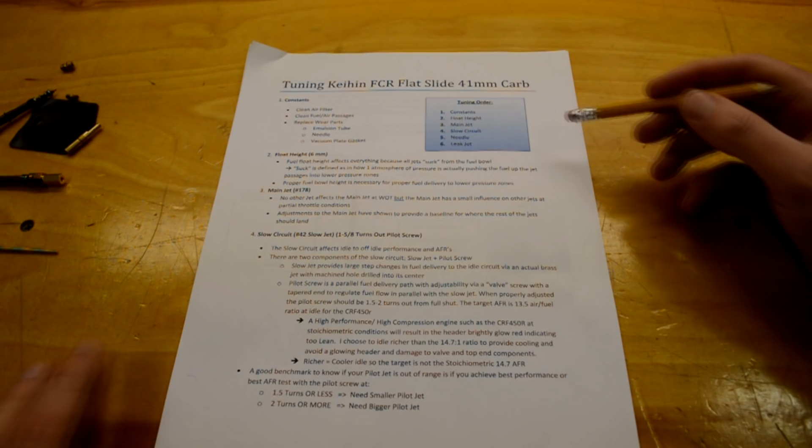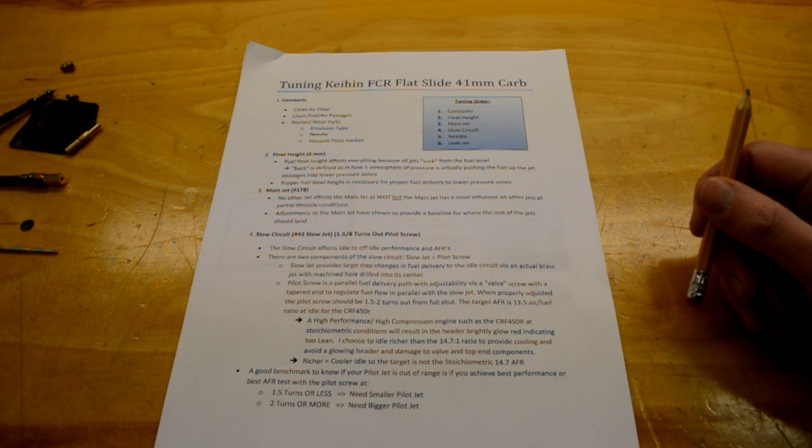This tuning order I came up with wasn't from any specific location, but was more of a collaboration of internet searches, the Honda manual for my bike, and some forums like Supermoto Junkie, and also mostly Thumper Talk. But I came up with this tuning order that I found most useful.

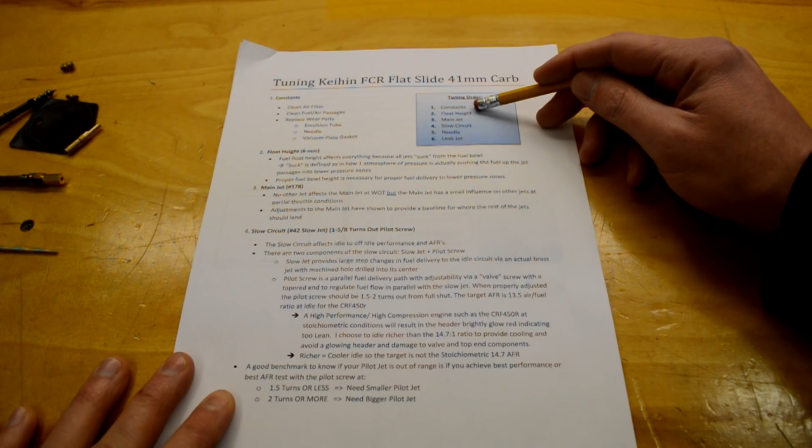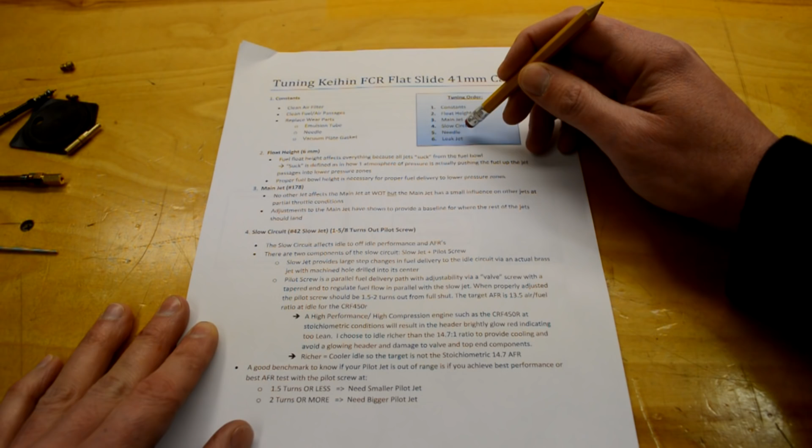First is your constants, and I'll explain those later. Second is your float height. Third, go to the main jet. Fourth, the slow circuit. Fifth, you're going to pick a needle, and then sixth, and the final one, is your leak jet.

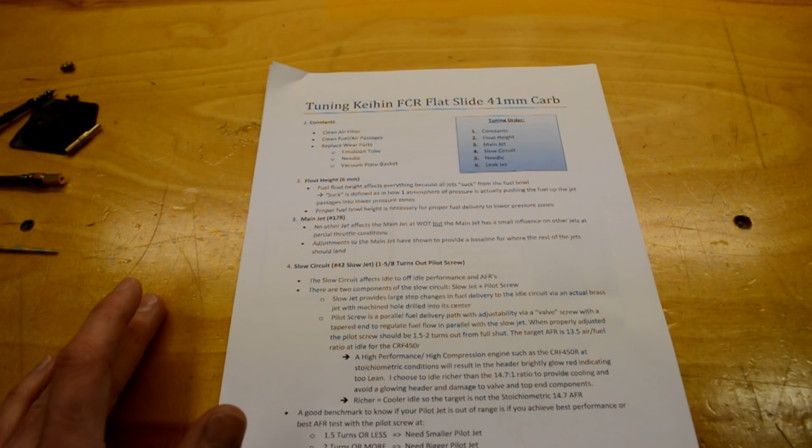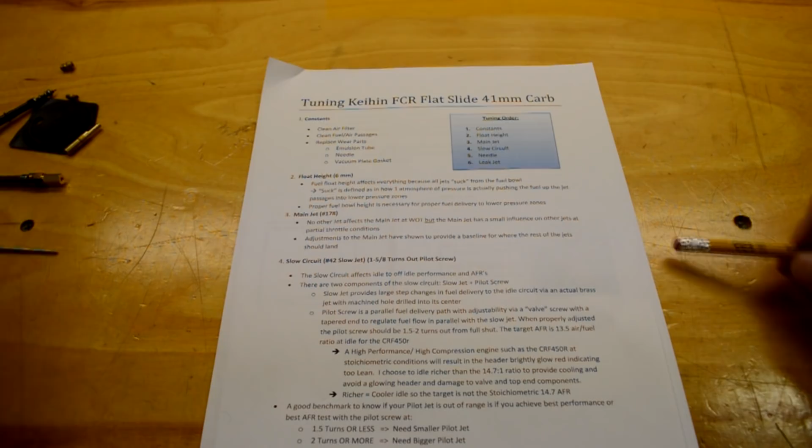What I mean by the constants is starting off with a clean air filter. There's no sense tuning with a dirty air filter, so use a clean one. Also your fuel and air passages - there are countless orifices and fuel delivery paths machined into the barrels and body of the carburetor, and they all have to be able to supply the proper amount of fuel that the jet is delivering to them.

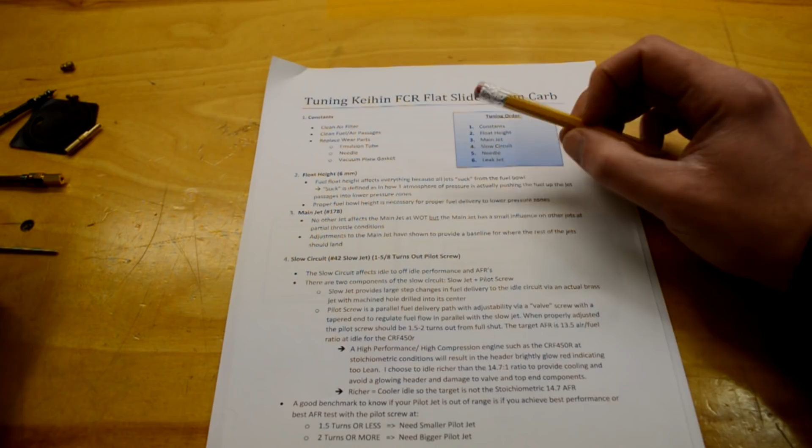Also, replace wear parts. The emulsion tube, needle, and vacuum plate gasket are the three I can think of off the top of my head. The emulsion tube is what actually carries the needle, so you have the needle dropping down into the emulsion tube with the main jet below it.

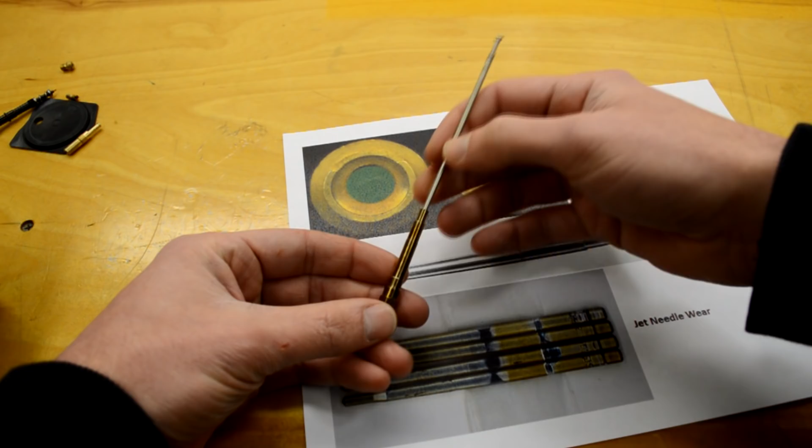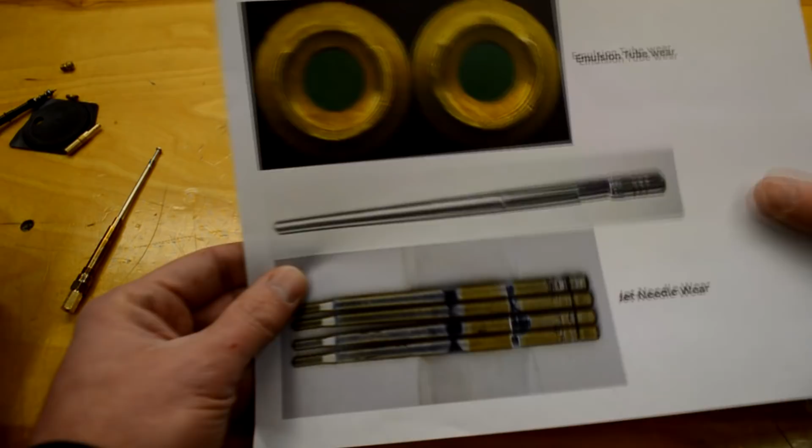On big bore single cylinder engines there's quite a lot of vibration, and what can end up happening is when that needle is at a partly retracted position, it can vibrate and actually wear out the emulsion tube. So shown in this picture, you have an emulsion tube with a green circle overlaid onto it, and in this dark area you can see where the metal is worn away, and what that's doing now is actually passing fuel up through the main jet and into the carburetor body.

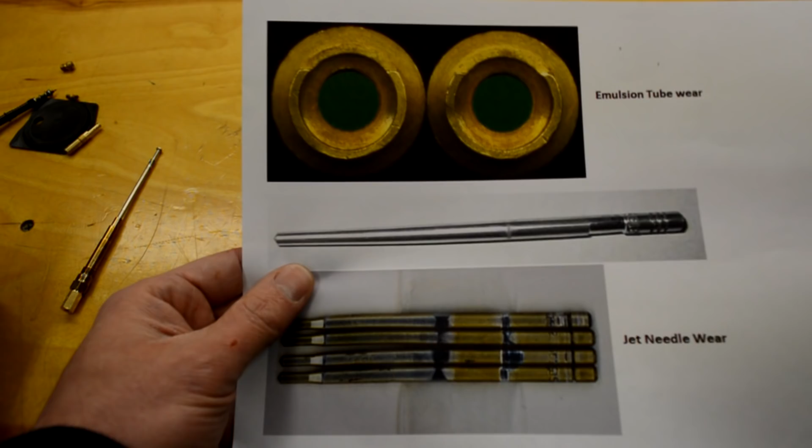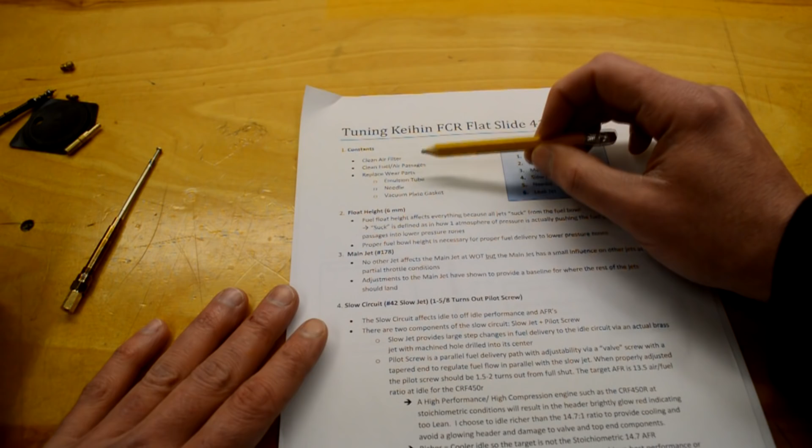Also in the needle you have excessive wear near the clip position, and some minor finish wear, but still the decreased metal surface is allowing fuel to leak by. So that's what I mean - go through the carburetor, clean it out, make sure there's nothing blocking the passages, because if you're trying to tune around mechanical deficiencies, you're just going to end up chasing yourself, and you're going to end up doing it anyway in the end after already putting effort into it.

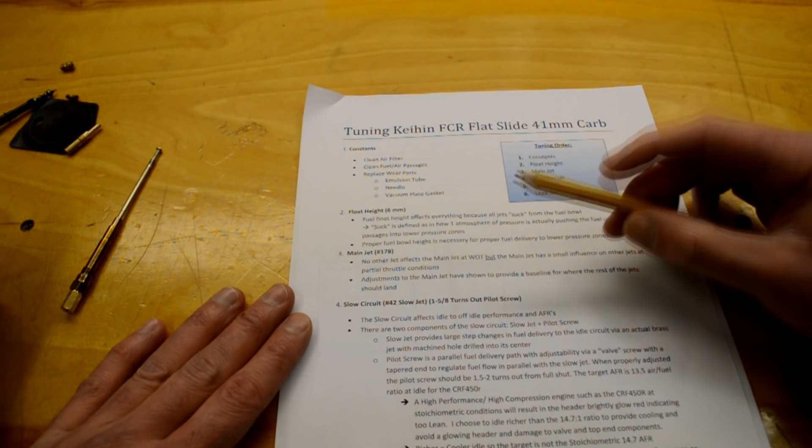So right from the beginning, start off with the constants. Get a clean air filter on there, clean all the fuel and air passages, blow them out with air, and get everything good to go before you even start messing with the jets.

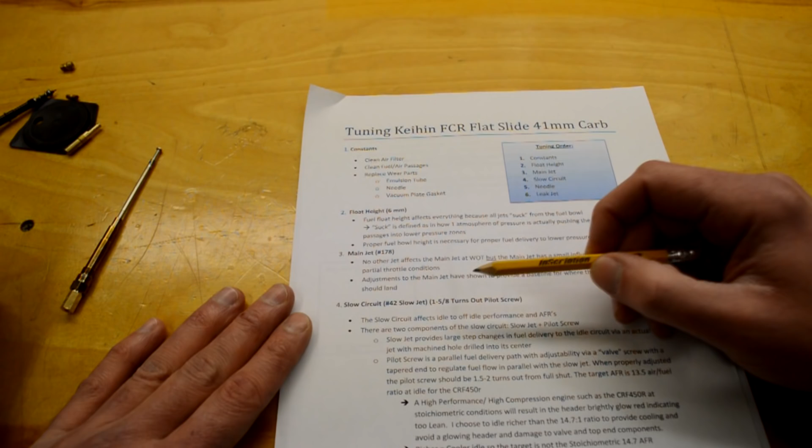Number 2 is your float height. Should be 6 millimeters. The float height affects everything because all your jets suck from the fuel bowl. When I say suck, I mean you have a fuel level in here, and one atmosphere of pressure pushing down on that fuel surface. All the jets actually stick into that fuel level.

In the throat of the carburetor, when you have high velocity air moving through, it creates a low pressure zone right at this venturi. That low pressure area, combined with the outside atmospheric pressure, is actually pushing the fuel from the fuel bowl up the jets into the carburetor throat.

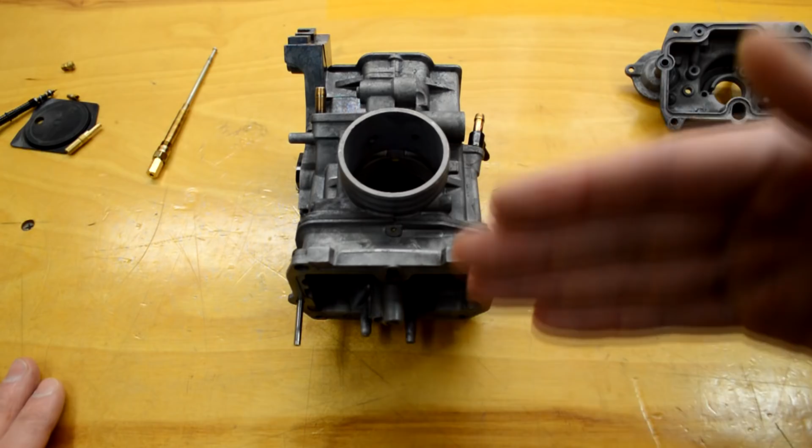So if you have a high or low fuel float level in there, in conjunction with atmospheric pressure, your jets are going to be moving a different amount of fuel than they were intended for. That's why it's important to have your fuel float height set perfect before you even start to tune jets or the rest of it, because that has an effect on every jet.

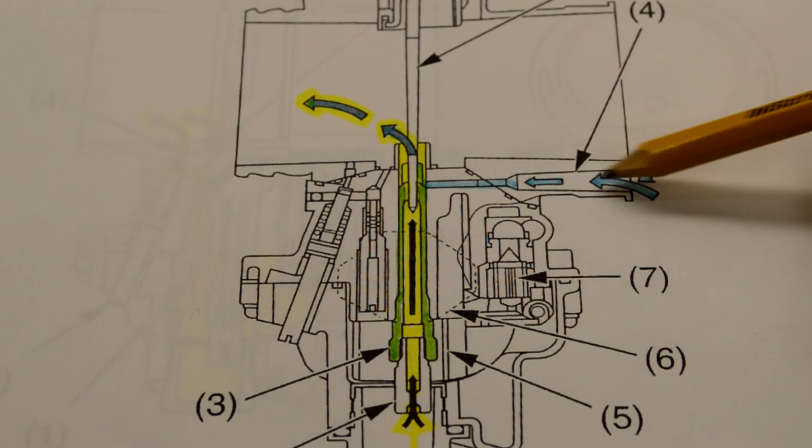How the main jet works is you have an air jet. It's non-adjustable, but it passes air through the clean side, here, through this tube, and that's the blue. What happens is your float height sets the fuel level down here.

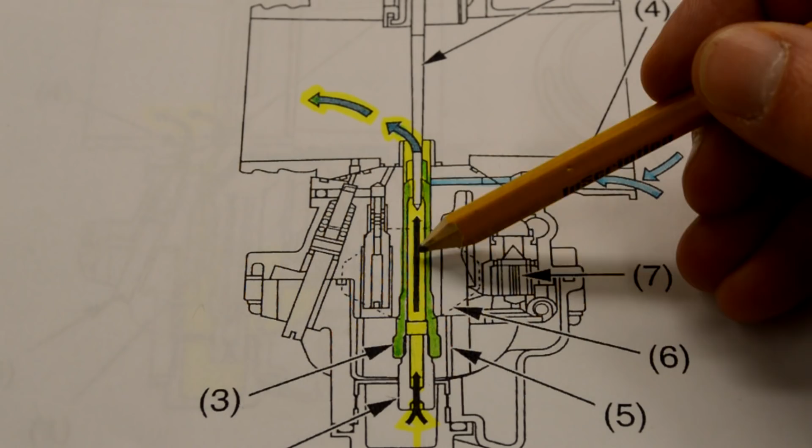So you have fuel up to here, which is burying the main jet pickup, down here. As air moves in through this tube, it creates that low pressure area, and fuel is being sucked up through the main jet, through this orifice, up into the emulsion tube area, and the needle, being all the way out, is letting the fuel just flow right up into here and mix with the air.

The main jet for an 08 CRF450R should be a 178. The reason why I'm starting with this one first is because no other jet affects the main jet at wide open throttle, which is where the main jet operates. But the main jet has a small influence on other jets at partial throttle conditions. So doing anything else in the carburetor isn't going to make any change to your wide open throttle condition with your main jet.

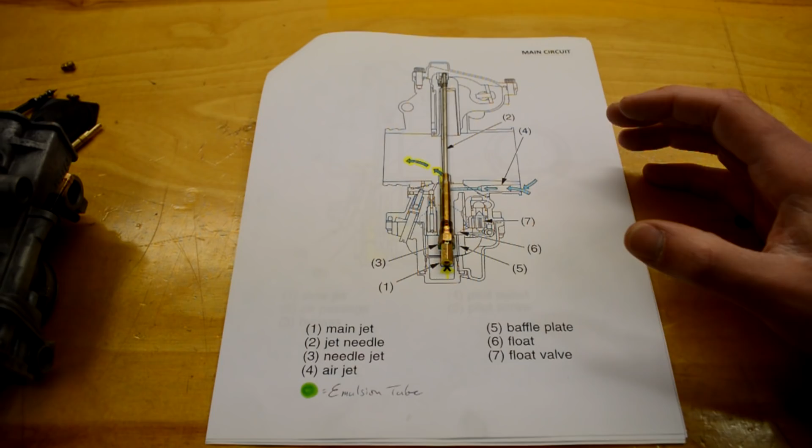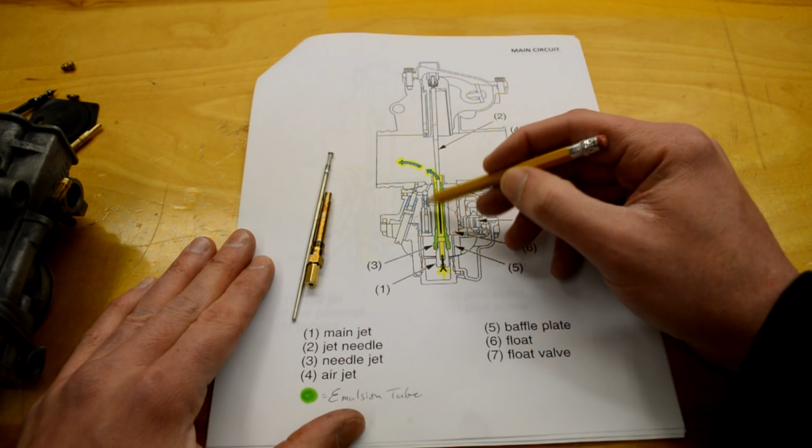When the throttle's closed and the emulsion tube is supporting the needle, you have a small amount of fuel leakage up through the needle and emulsion tube taper, just because of the venturi action going on right here. Even though some of the fuel is being sucked up through the slow circuit, which we'll get to after this, most of it's being regulated by the slow circuit. Some of it's actually still being pulled up that main jet, leaking up through here and into the carburetor throat for the engine to burn.

So that's why it's important, when you've got everything else you don't have an idea about, to just get the main jet settled in first, and then that's one down.

How this works is you have air, again, coming in through the air screw, the air pilot, and it comes and mixes in this section right here next to these drilled holes in the pilot jet. It pulls or sucks some of the fuel up through the pilot jet and allows it to go up this bore into the carburetor throat area.

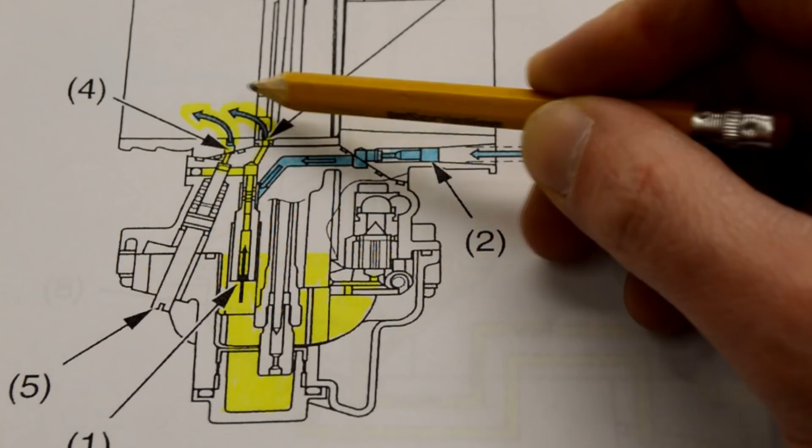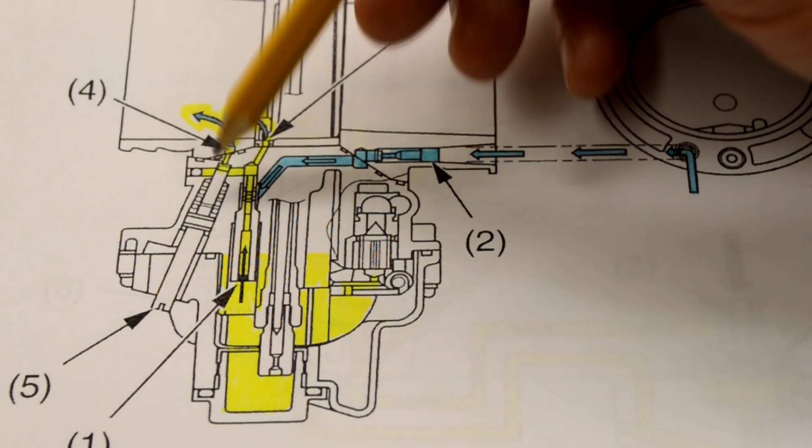In conjunction with this one, you also have fuel being moved up through the pilot screw and through this bore, also coming up into the throat area. The motive force for these is the air that's rushing through the engine, not so much the air screw for the pilot screw. So it's kind of like two valves, or one valve and one jet, and in parallel they deliver the fuel you need to idle the motor.

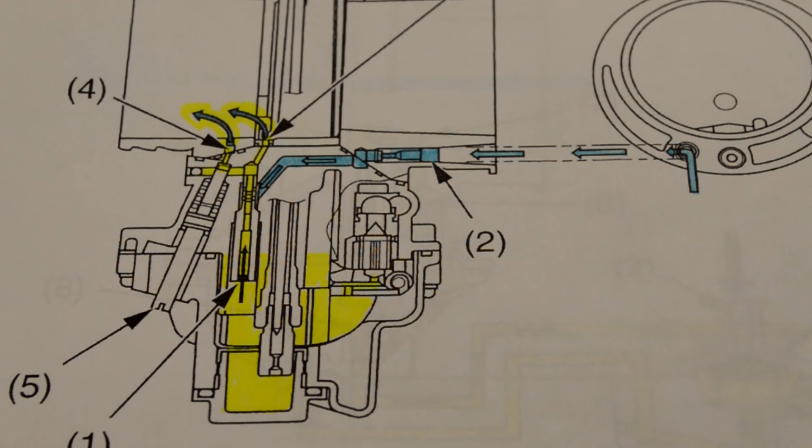The slow circuit affects idle to off-idle performance in air fuel ratios. There's two components of the slow circuit: you have the slow jet, which is this brass machined orifice that's non-adjustable, and then you have the pilot screw, which is this black thing right here.

It's basically a valve. The slow jet provides large step changes in fuel delivery to the idle circuit via an actual brass jet with a machined hole drilled in the center. The pilot screw is a parallel fuel delivery path with adjustability via a valve or screw with a tapered end to regulate fuel flow in parallel with the slow jet.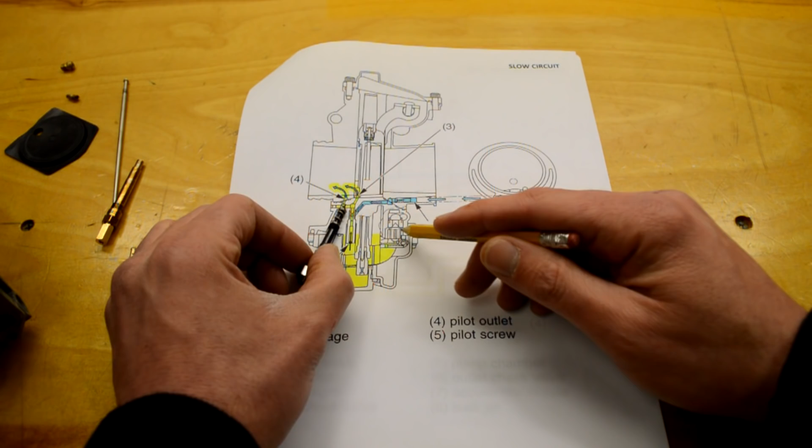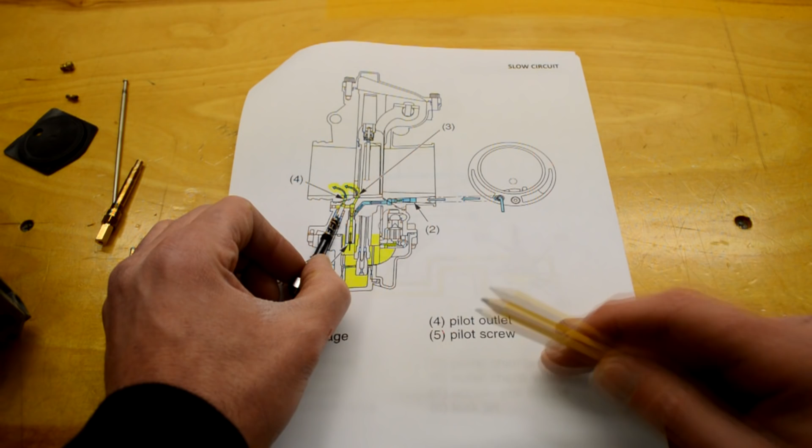So what that means is if you fully seat this pilot screw, screwing it all the way in, and then back it out 1.5 turns or less, like if you have it out only 1 turn, that means you need a smaller pilot jet - you need this hole smaller. On the other side, if you have to back it out quite far, more than 2 turns, then you need a bigger pilot jet, a bigger hole in this thing. So you should be in the range of about 1.5 to 2 turns from fully seated, and then you know you have the right pilot jet in there.

So now that we've talked about the main and slow circuit, let's talk about AFRs for a minute. I got to a point where I was trying to tune the motard just by hearing it run better, like the manual says, but that's not a good enough metric to get it where I wanted it to be. So what I ended up doing was installing an air-fuel ratio meter on the bike. It's powered by the onboard 12 volts, it's removable so I don't need to leave it in all the time, and it's greatly helped me with tuning, especially the main jet and the mixture screw.

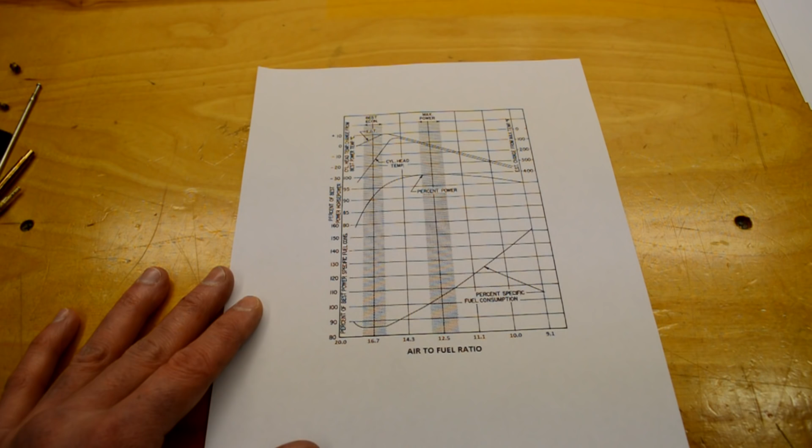Normally you'd be shooting for about 14.7 to 1 air-fuel ratio. That's the stoichiometric burn for fuel, the cleanest burn, but that's not necessarily where you're going to get the most power from. I got this chart from Lycoming Aircraft Engines' website, and they claim the best economy is gained at about 16.7 to 1, however max power is gained at about 12.5 to 1.

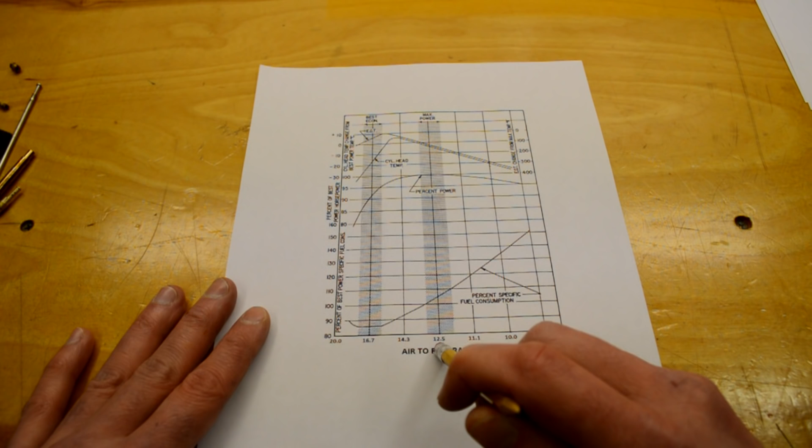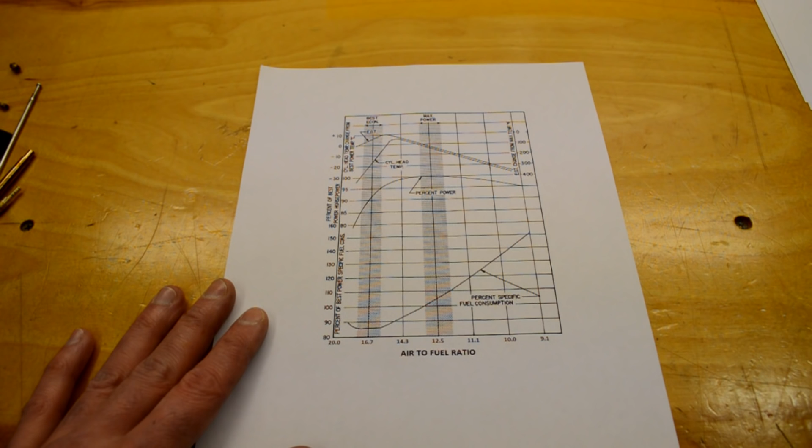If I could idle at 14.7 to 1 without my header pipe glowing red, I would, but I don't like how red and hot the exhaust gets on this engine at 14.7, and the engine doesn't even like to idle that lean. So I actually shoot for idling around 13.5 to 1, and as I'll tune the needle later, I like to approach 12.5 or 13 at wide open throttle.

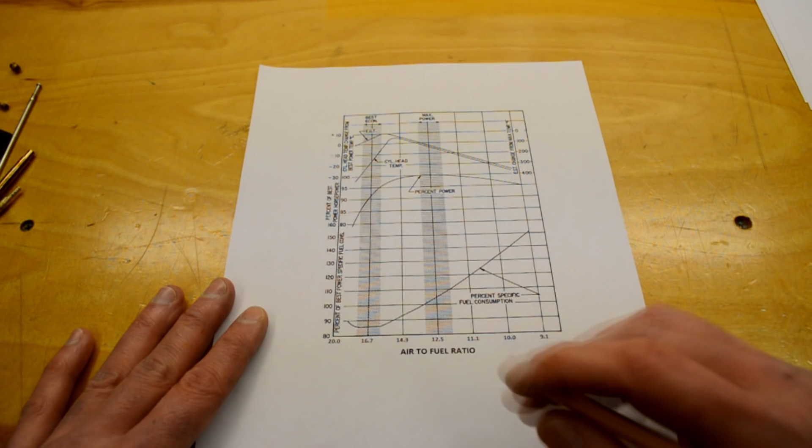So after you have the slow jet dialed in and you're idling around 13.5 to 1 or so, or you're happy with it, the next thing you want to go after is the jet needle. The jet needle is mostly responsible for quarter to 3/4 throttle conditions, and that's going to dictate your AFRs through that range. You've got two components of the jet needle: the needle type and the clip position.

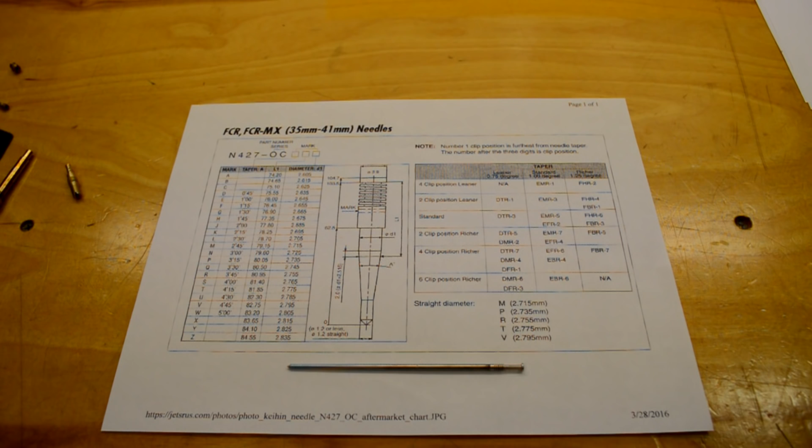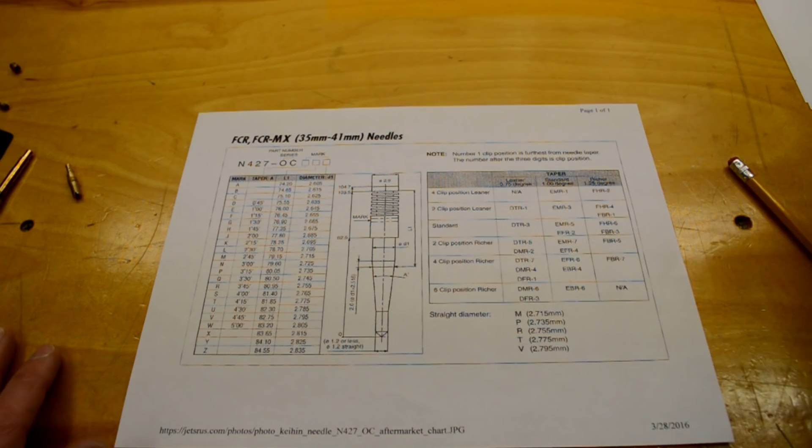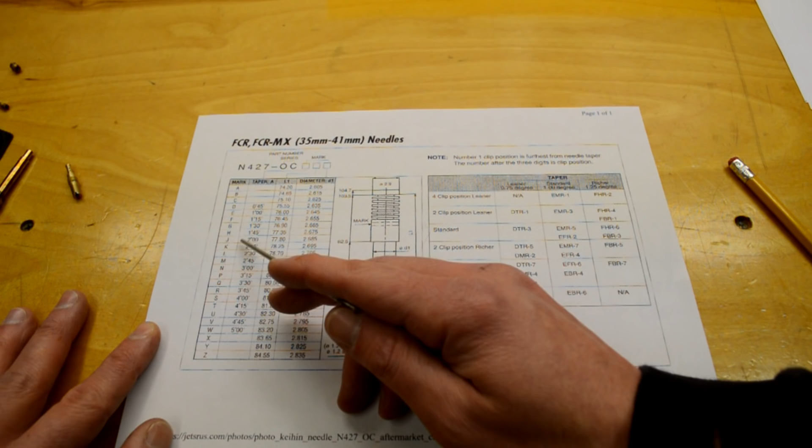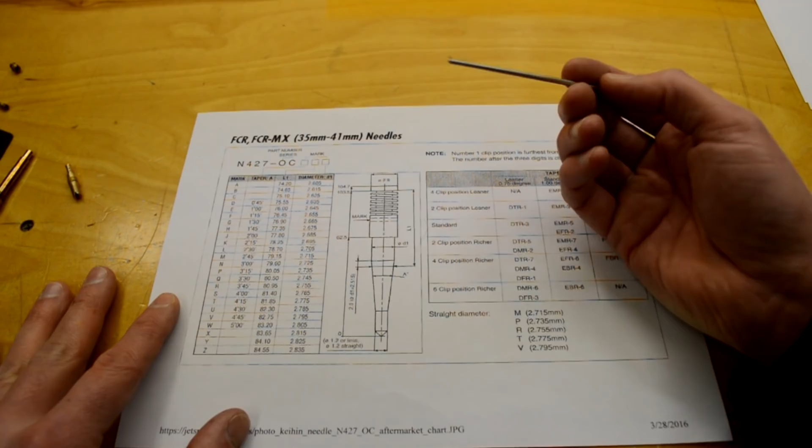The needle type is determined through this chart here - this is off a Keihin webpage, actually from Jets R Us, but it's a standard Keihin FCR jet selection chart. What it's saying is you have four alphabetic characters that determine what the needle is. So like the standard one for a Honda, the '08 CRF450, is an NJGR. That means N, which doesn't change, J, which means it's a 2-degree taper, G means the L1 is going to be 76.90 millimeters, and then R, the last character, means it's got a diameter up here at the top of 2.755 millimeters. You can see they're all in order. You use this chart to determine what condition you need for quarter, half, and 3/4 throttle.

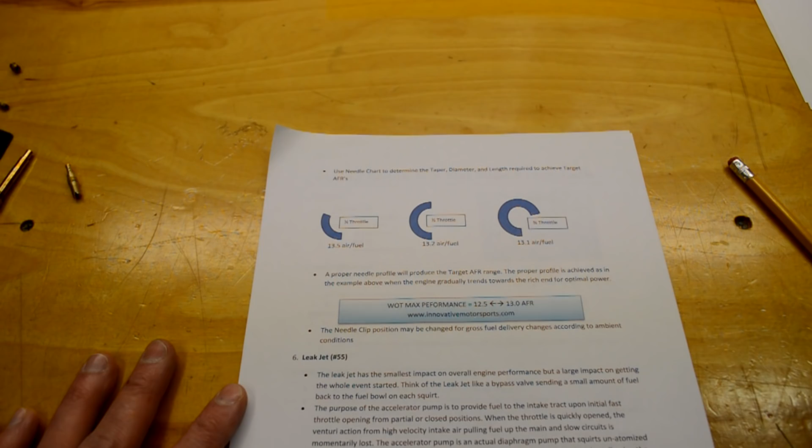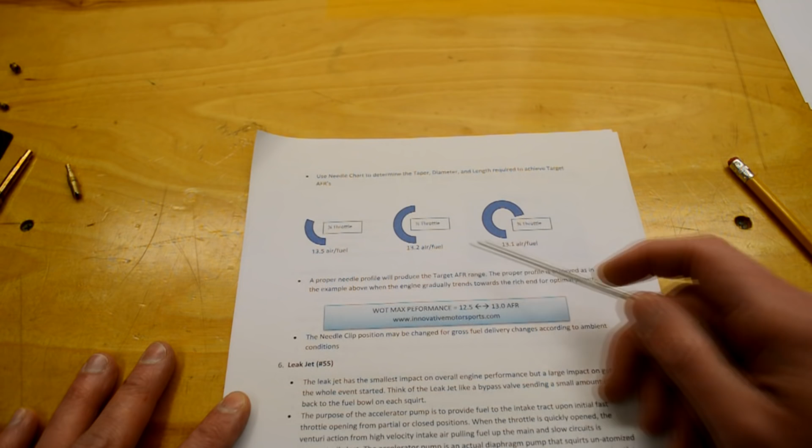So you're going to use that needle chart to determine the taper, diameter, and length that you're going to need to achieve target AFRs, such as at quarter throttle should be about 13.5, half throttle should be coming down to 13.2, 3/4 throttle 13.1, and wide open throttle maximum power is going to be 12.5, but I try to shoot for like 13.0.

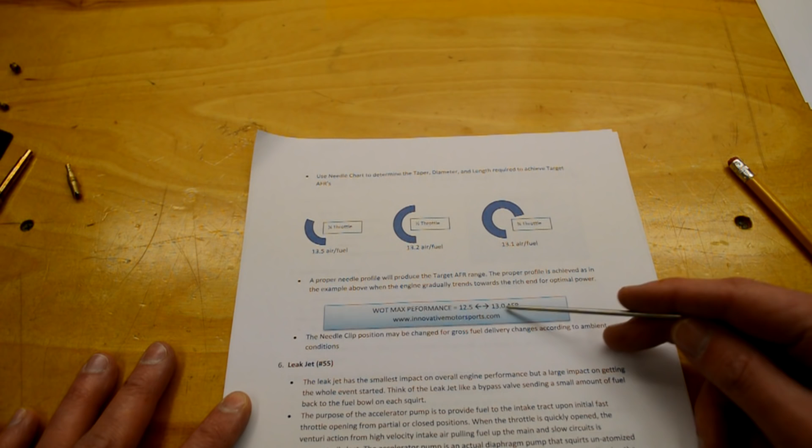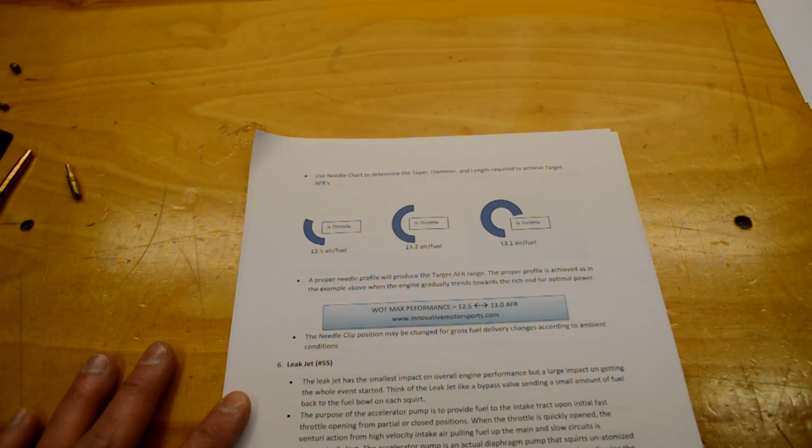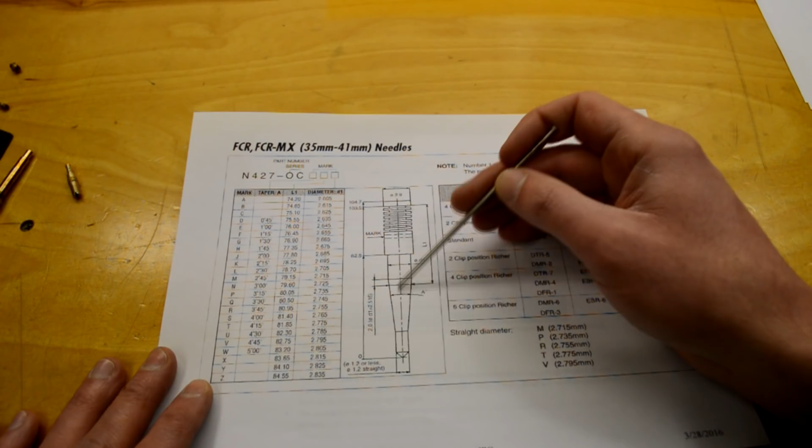That's good for wide open throttle, I feel safer there. Your proper needle profile is going to produce the target AFR range. Using this chart, if you need a larger diameter to lean it out at idle or low throttle conditions, you're going to make this area bigger. If you need it richer, you're going to make this area smaller. Remember, this is the taper on which the needle rides in the emulsion tube, so the smaller this area of metal is, the richer your mixture is going to be, because more fuel is going to be leaking by.

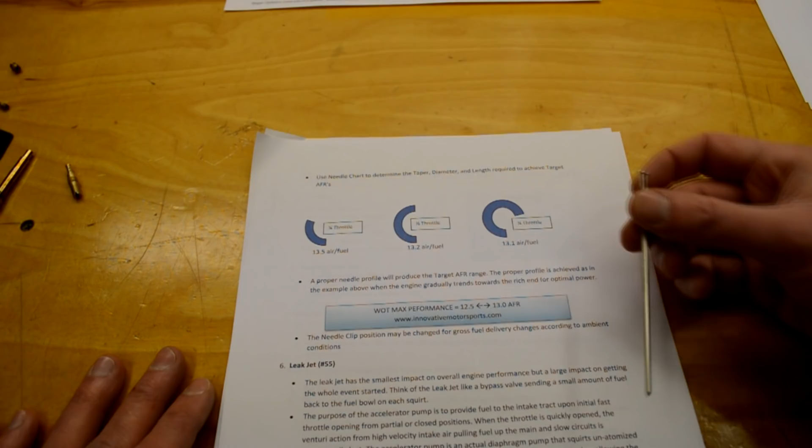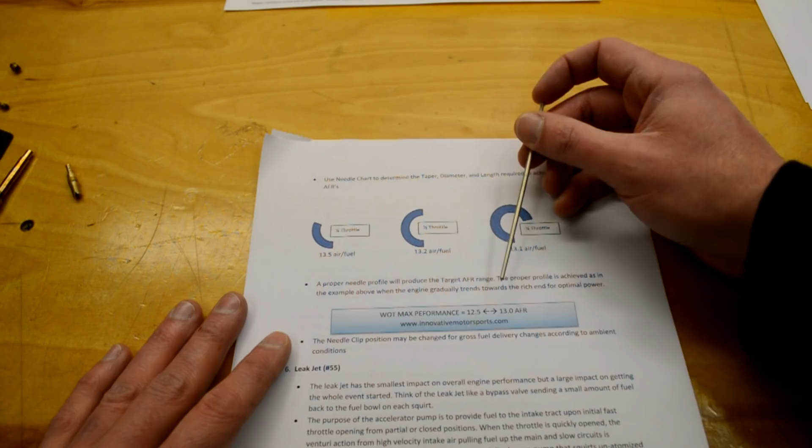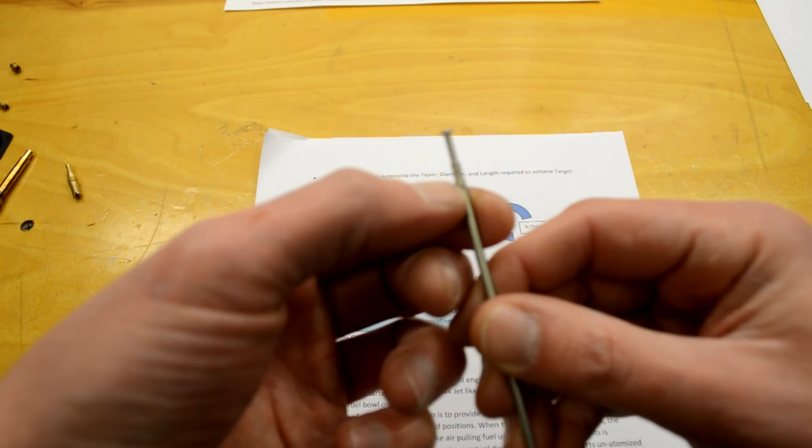And then the needle clip provides gross changes once you get this profile right. So if you find that you're super lean down here and super rich up here, you've got to balance that using the chart to get the profile that you need. Once you have the profile you need and get a good linear change like this, then you can use the actual clip positions. There's a clip that goes on each one of these, and that'll drop the needle up or down to make it richer or leaner overall.

And the last jet we have is the leak jet. You can see it's the smallest one. It also has the smallest impact on overall engine performance, but it has a large impact on getting the whole event started. The leak jet is kind of like a bypass valve that sends a small amount of fuel back to the fuel bowl on each squirt.

If you're not sure what I'm talking about, check out a couple of the videos guys have posted about the accelerator pump in action. It'll make sense to you.

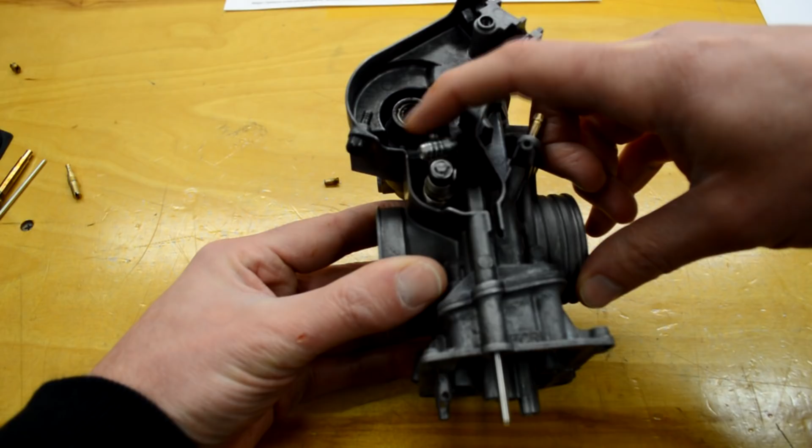So when you open up the throttle with your hand, it actually moves this pump here, and that plunger at the bottom acts on a diaphragm pump and squirts fuel out of this little brass nozzle inside that throat. The purpose of the accelerator pump is to provide fuel to the intake tract upon initial fast throttle opening from partial or closed positions. When the throttle is quickly opened, the venturi action from that high velocity intake air in the throat is momentarily lost, and the accelerator pump is an actual diaphragm pump that squirts unatomized raw fuel onto the backside of the intake valves down the throat.

So you can get the engine going and then regain that velocity of air, because that air velocity is what you need to pull fuel out of the rest of the jets. So the accelerator pump gets it started, and the rest of the jets really take over making power. But to get there, you need the accelerator pump.

If you have a smaller hole, that means you're squirting more fuel onto the back of the valves. And if you have a bigger hole or a bigger jet, then you're squirting more fuel back into the fuel bowl. So that's one thing that's important to remember when tuning the leak jet. The standard leak jet is a 55 for the 08 CRF450R.

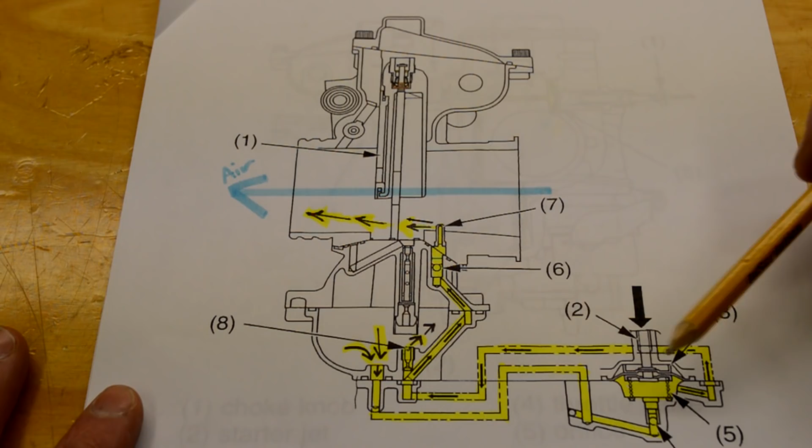Here's a detail of what I was just talking about with the accelerator pump. You have the accelerator pump right here, and that takes the suction off of the fuel in the fuel bowl. Fuel from the fuel bowl moves into there through this check valve into this diaphragm area, and as you operate the throttle with your hand, you actually move this plunger down, and it pumps fuel out this line. Your leak jet is actually right here.

So some of the fuel actually escapes back into the fuel bowl into this area, but the rest of it comes up this pipe through there, and then it squirts out that nozzle right down the intake tract.

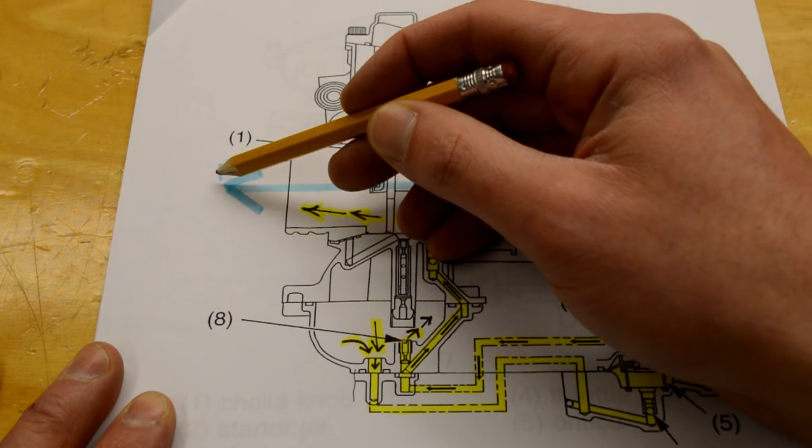So you can see how if you have a bigger hole here, you're going to get less fuel out, and if you have a smaller hole here, you're going to get more fuel coming out of that accelerator pump.

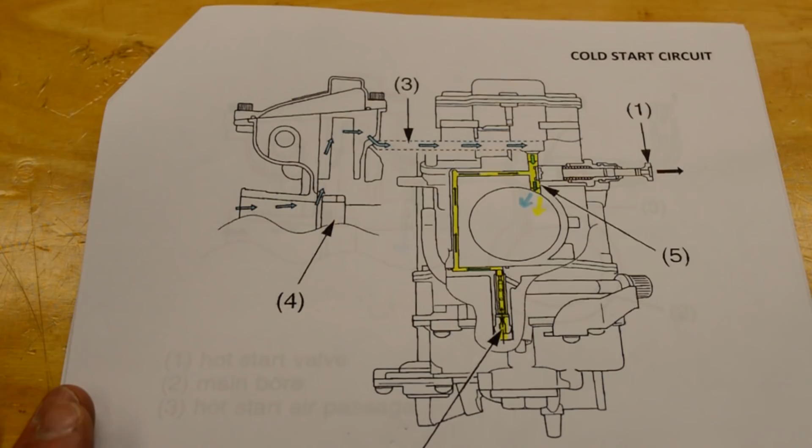One of the other circuits I wanted to describe was the cold start circuit, or your choke. You have another jet in there - this is your starter jet, and it picks up fuel from the fuel bowl. When you open up that choke tube, you allow the fuel to mix with the air and drop into the intake tract. That's all you're doing - you're just richening up the idle air.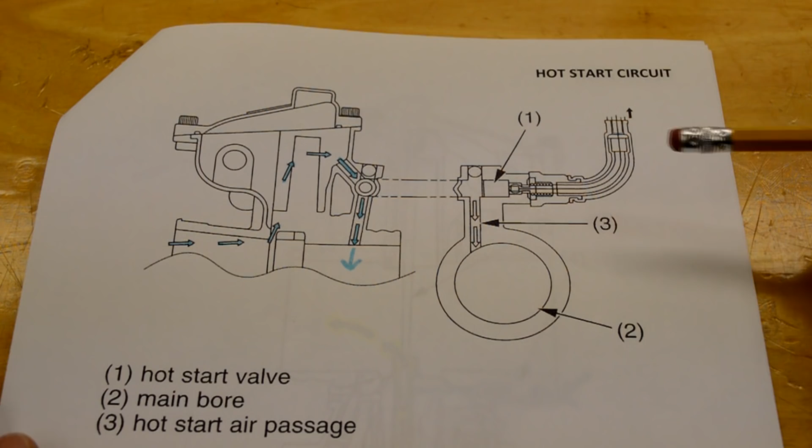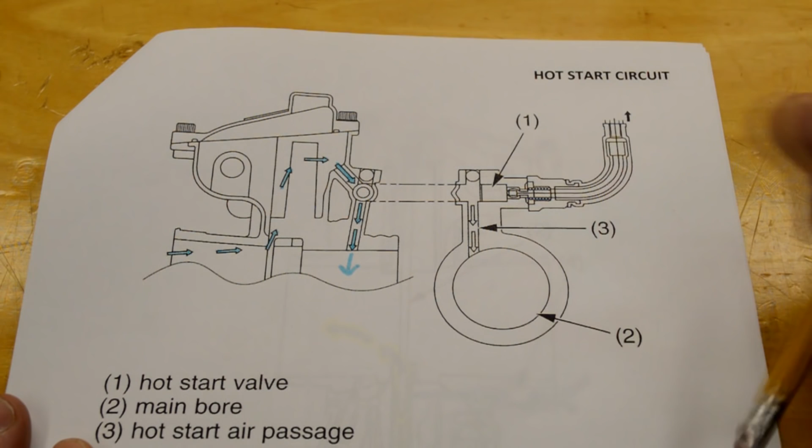This is your hot start circuit. A lot of people confuse this with a decompression lever. It's not. The hot start circuit doesn't add any fuel - it adds air, because when these motors are hot, they need a lean condition to start. So what you're doing when you pull on that hot start lever is you're opening up a bypass for air to escape around the slide and come into the motor to lean out the mixture to allow it to start in a hot condition.

So with the air-fuel ratio meter I'll have on it, it has an internal resistance heater that has to heat up to about 600 degrees before the element works.

The bike started idling about 13.5, 13.7. And this is on a cold motor.

So initial light cruising, we're up in about 14.0, 13.8, 13.5. Again, this is all on a cold motor, so it's going to change a little bit once we get up to temperature.

Some pretty aggressive throttle here, and got about 13.2 to 12.9. Back to cruising, looking about the same, in about the 12.9 to 13 range.

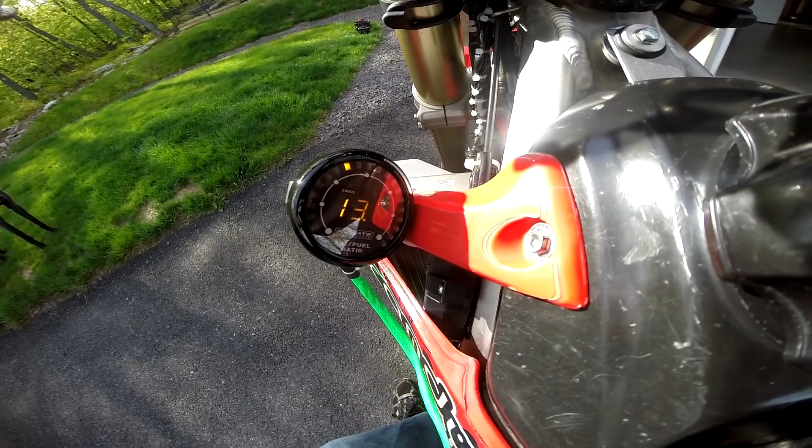And of course, the main jet, which is a little on the lean side, you saw it bump up into the 14s - that's going to richen itself up as the air density goes down over the summer and the weather gets hotter. It's still springtime here in Pennsylvania, so hopefully I won't have to jet this thing again until next fall. So back from the ride, we got it idling at about 13.2, 13.0, that's good because it didn't change much from when we started.

So we got the tune done. Everything's all set to go. Ended up a little bit on the lean side, but it's still springtime, so as the weather gets warm around here, the bike's gonna richen itself up. But really happy with it.